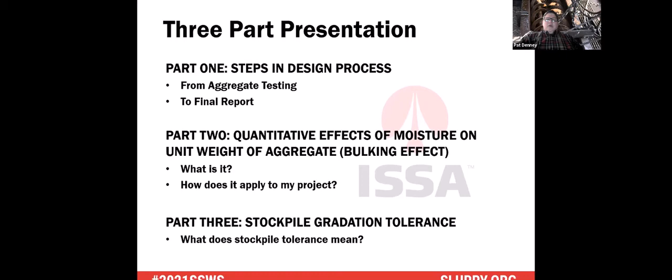We're going to talk about microsurfacing today and some of the different items, different parts. It's split out into 3 different sections. First section is for design and the design process from aggregate testing to the final report. Then we'll talk a little bit about the bulking effect, or the quantitative effects of moisture on the weight of aggregate. And then I want to talk briefly about stockpile gradation tolerance and what it means.

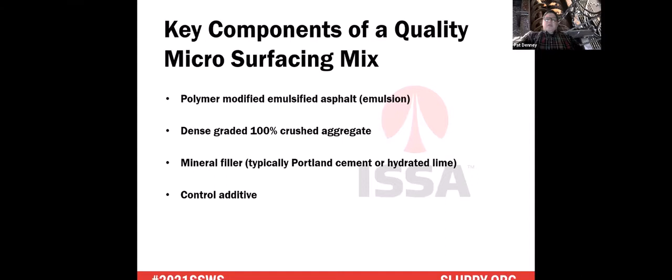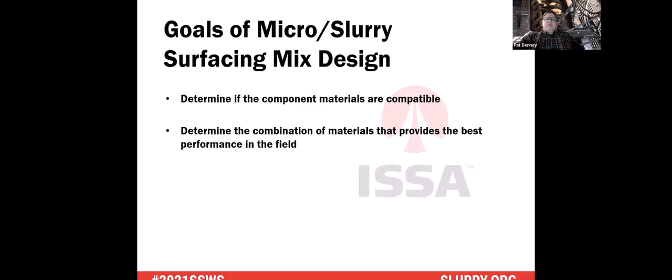The key components of a quality microsurfacing mix are polymer modified emulsified asphalt or an emulsion, dense graded 100% crushed aggregate, mineral filler, typically Portland cement or hydrated lime, and also a control additive. The goals of microsurfacing and slurry surfacing mix designs are to determine if the component materials are compatible and also to determine the combination of materials that provides the best overall performance in the field.

When we get an aggregate in for microsurfacing or slurry seal, the first thing we need to do is check the gradation and sand equivalency. If either one of those fails, it automatically triggers a retest of a second pail of the material that came in, and then we'll determine from there whether we move forward with the rest of the testing. We also test methylene blue value and report that, and we'll also do the unit weight or the bulking effect and report that.

Let's say everything passes on the aggregate, so we're going to move on to making emulsions. I like to start in my design process using what I call 4 corners, especially if we're looking at working with a new emulsifier or an unfamiliar aggregate. What I mean by 4 corners is that the emulsifier will be at a high and low value, the soap solution will be at a high and a low value, and then we also want to make sure that the emulsion we produce fits the specification that we're working with.

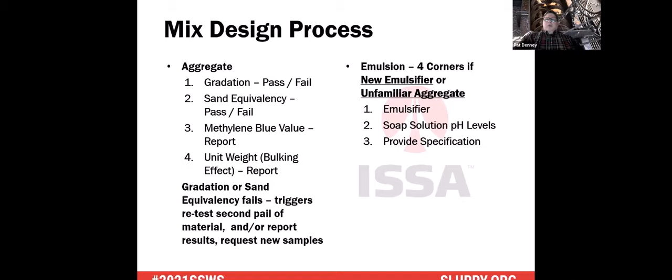After we get emulsions produced, we'll start doing our trial mixtures. During the trial mixtures, we're going to look at the effects that pH has on curing and on mixing. We're also going to look at the mineral filler and its effects on mixing and curing, so we'll adjust the mineral filler up and down to see whether it provides better curing and better mixing.

For the emulsion formulation, we're going to look at the different effects of the formulation, so whether it's a high chem load or low chem load. We're going to evaluate and record the mix times for that, and through all that, we're going to try and optimize that formulation. Then we're also going to evaluate the optimum moisture content, and we're going to do that based off of consistency, mix time, and curing at room temperature.

After we get our hand mixes completed, then we'll move to the performance testing, and you can see on the right the list of the tests that we run. I'll talk about those a little bit as we go through this presentation. And then finally, we'll write a report and submit it for review before sending it off to our customers.

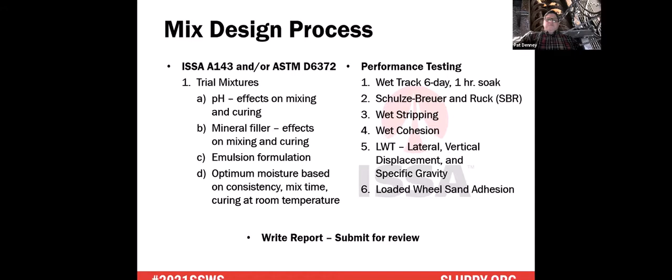Trial mixes. So we start out adding materials into our bowl the same way that they would be added into the pug mill on a micro surfacing machine. So aggregate, then mineral filler, water, control additive, then emulsion.

But what we primarily try to do is meet customer expectations. So we may be looking at a higher mix time or quicker cure time or whatever. So we're evaluating all those issues when we're doing the hand mixes.

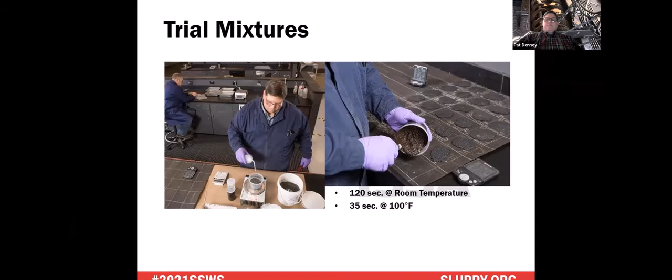ISSA TB100 is a test method for wet track abrasion of slurry surfacing systems, and the purpose of it is to establish minimum asphalt content for the slurry surfacing system. It also provides a determination of long-term moisture susceptibility after a 6-day soak.

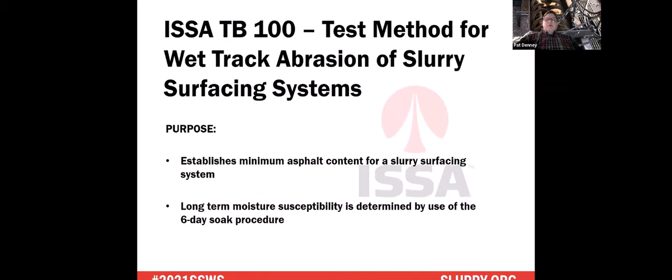Afterwards, you dry it and weigh it again, then calculate your grams per square foot loss. For 6-day soak wet track, it's 75 grams per square foot. For a 1-hour soak, it's 50 grams per square foot, and that's for microsurfacing. For slurry seal, it's 75 grams per square foot for a 1-hour soak.

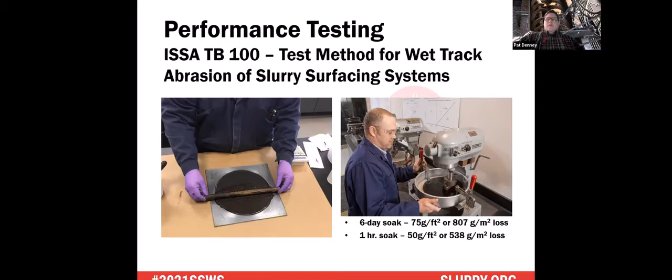When we make the specimens for wet track, we'll also start making our specimens for the Schulze-Breuer and Ruck procedure, typically because both of those samples have to soak for 6 days before we test them.

The purpose of the Schulze-Breuer and Ruck covers the determination of compatibility between aggregate fines of a specific gradation and emulsified asphalt residue, in which that emulsified asphalt residue stays the same no matter what the aggregate is. It's always the same percentage: 8.125% plus or minus 0.1.

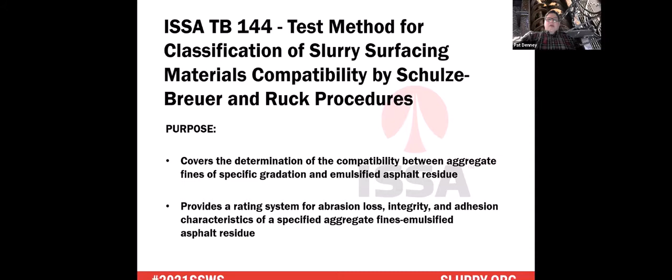It also provides a rating system for abrasion loss, integrity, adhesion characteristics, and the specified aggregate fines and emulsified asphalt residue. You can see here the 4 stages: absorption, abrasion, Ruck integrity, and adhesion. At stages 2 through 4, each stage earns a point rating, and it can only pass with a minimum of 11 points.

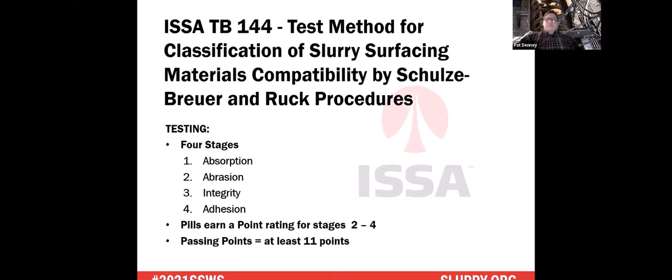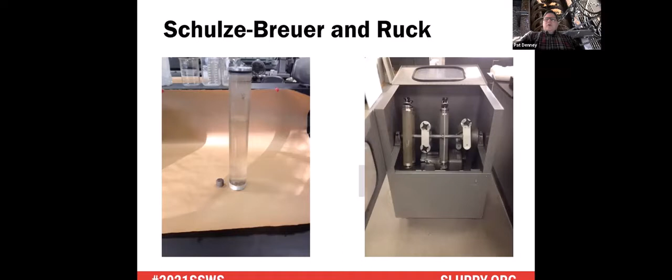We make the specimens in a small mold, compact those at 140 degrees Fahrenheit, let them cure out, and soak them for 6 days. After 6 days in a water bath, we pull them out, weigh them up, put them in this tube on the left full of 750 milliliters of water, then put them in the machine on the right to allow that to abrade through the water for 3 hours.

After that 3-hour period, we weigh it again, take it out, weigh it again, saturated, surface dry, and then put it in a beaker filled with water and let it come to a boil.

Then we put it into the basket and let it boil for 30 minutes. After 30 minutes, we take it out of that basket and let it cool for a few minutes so that we can handle it.

Then we weigh the largest cohesive mass again, and then we apply based off of that weight. There's a calculation that takes place, and then you can determine what your rating is for that different stage as well.

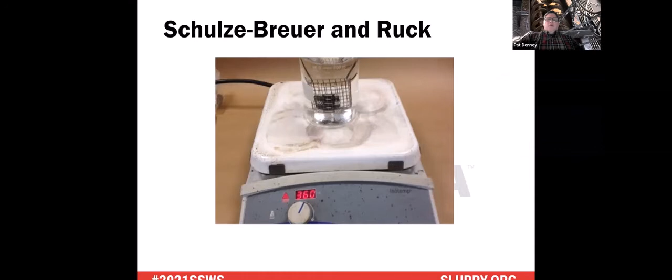The next test - while the wet tracks and the Schulze-Breuer and Ruck samples are in the water bath soaking for 6 days, we'll continue working on the design, doing other testing. These tests do not take near as long for curing and testing as those others, so we can do these and get the design done quicker instead of waiting for any test to finish.

So this is a test method for the measurement of excess asphalt through the use of a loaded wheel tester and sand adhesion. The LWT is intended to compact the fine aggregate bituminous mixtures such as slurry seal by means of a loaded rubber tire reciprocating wheel, and you'll see that in a minute.

The test may be used for design purposes to establish maximum limits of asphalt to avoid severe asphalt flushing under heavy traffic loads. So if you remember, the wet track was for establishing minimum asphalt content, and the sand adhesion test is to help establish the upper limits.

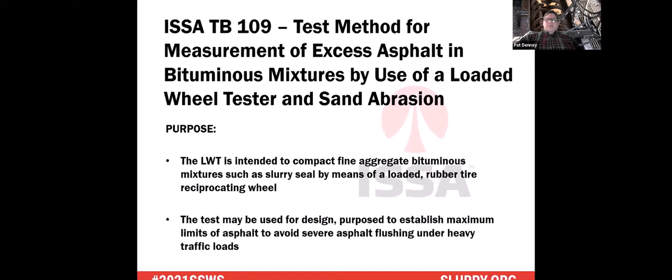On the left is the picture of the technician adding the specimen to the loaded wheel tester. You see the weights on top. That whole apparatus from the wheel with the weights weighs 125 pounds. The specimen is loaded into this machine and allowed 1,000 cycles over that specimen at 125 pounds.

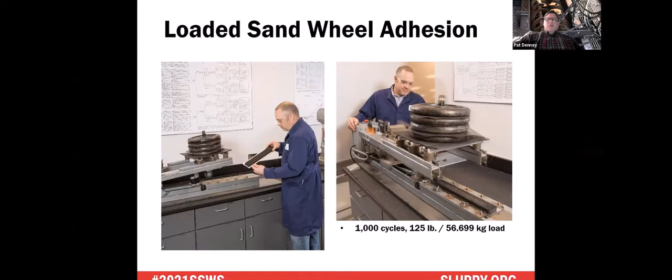You can see in this picture that there's three specimens: one before the test, one after it's been tested through 1,000 cycles, and the third after it's gone through the sand adhesion test.

Now the sand adhesion test comes in after we've done 1,000 cycles. We add hot sand onto the specimen, place a mold over that, add the hot sand, put a little metal plate over the top, and allow the machine to run over that specimen again at 100 cycles.

Pull everything off, tap the specimen trying to get all the loose sand off as we can, and then weigh it again. We weighed it before, we weigh it after, and then we'll get a maximum, or grams per square foot of sand adhesion. The maximum it can be is 50 grams per square foot. I apologize, I forgot to put that on this slide, but again, the maximum is 50 grams per square foot.

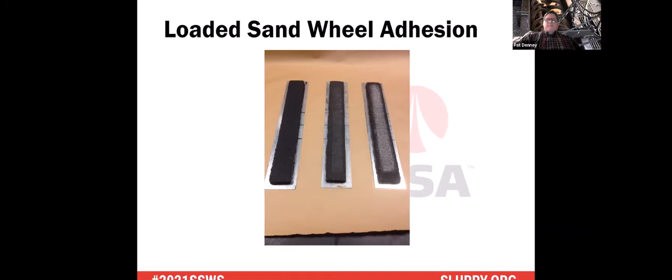Along with the sand adhesion, we also make specimens for testing the stability and resistance to compaction. We do that by measuring lateral and vertical displacement of that multi-layered fine aggregate cold mix.

Basically it's the same type of sample, but the difference is the curing for this specimen. It's a little longer cure before we actually do the test. It runs through the same number of cycles, 1,000 cycles.

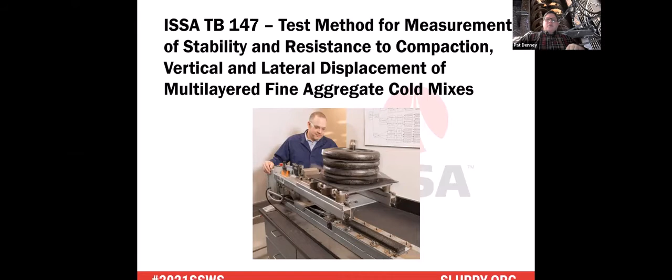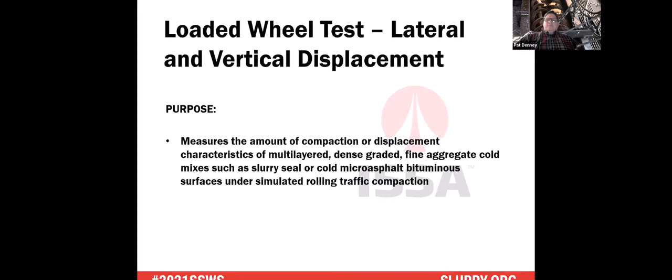The purpose is to measure the amount of compaction or displacement characteristics of the multi-layered, dense graded, fine aggregate cold mixes, such as slurry seal or cold microasphalt bituminous surfaces, microsurfacing, under simulated rolling traffic compaction. So as I said, 1,000 cycles.

Before we subject it to 1,000 cycles, we measure that specimen in 3 different areas along the center of the specimen and get an average. We do the same thing after the test. What we're measuring is the lateral displacement, how it moves apart or sideways, shoving if you will. It's not really shoving, but it does displace a little bit.

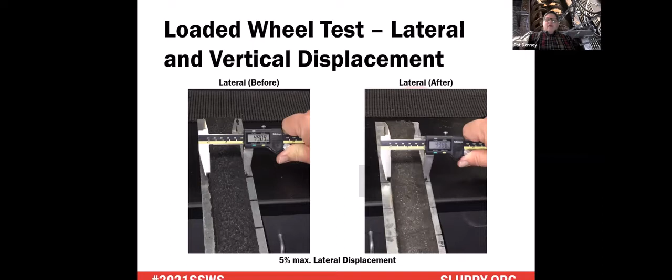The maximum for that is 5% lateral displacement. We'll do the same for vertical displacement, or the compaction of the material. We measure it before, we measure it after. It can be a maximum typically of around 10%.

We also measure specific gravity. Some specifications state that the specific gravity for the specimen should be done prior to lateral displacement. Some say after it's been compacted, or after the test has been run. But the maximum specific gravity is 2.1.

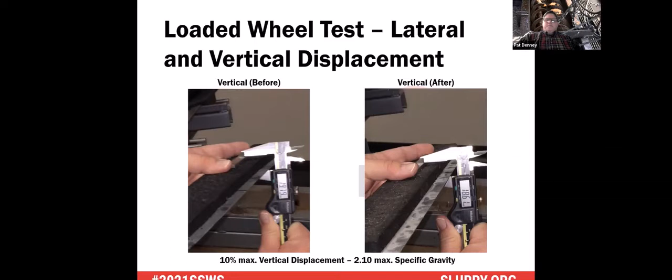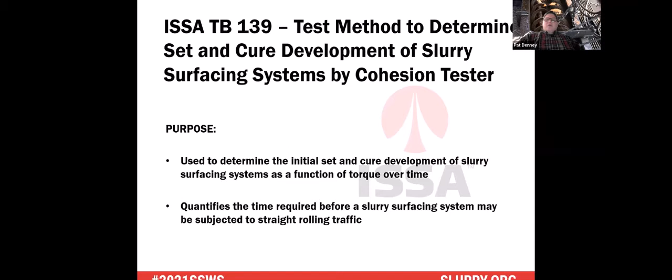The test method for determining the set and cure development of the slurry surfacing systems by cohesion tester is used to determine the initial set and cure development of slurry surfacing systems as a function of torque over time. This quantifies the time required before a slurry surfacing system may be subjected to straight rolling traffic.

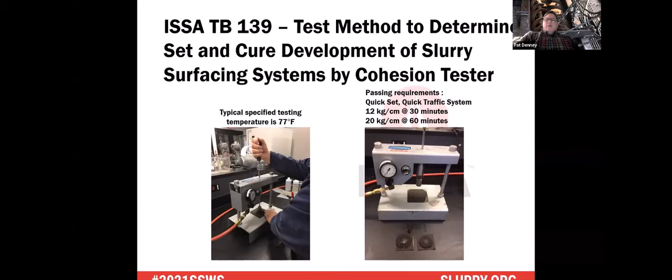The specification is typically for a quick set or quick traffic systems. It's 12 kilogram centimeters at 30 minutes. And for quick traffic, it would be 20 kilogram centimeters at 60 minutes.

It's allowed to boil for 3 minutes. There are modified boiling tests that boil for longer, but this particular test for ISSA TB 114 is a 3-minute boil test.

After it's through boiling, you decant the water and pour the specimen out onto a paper towel and let it set for 24 hours. Then it's basically a visual test—you come back and look at the material and determine with your eye as best you can the percent retained coating on the aggregate.

And if it's 90% or greater, it's considered satisfactory. Between 75 and 90 is marginal, and less than 75 is unsatisfactory. Now, personally, I've never seen one of these fail, but I'm not saying it won't happen, I've just never seen one fail.

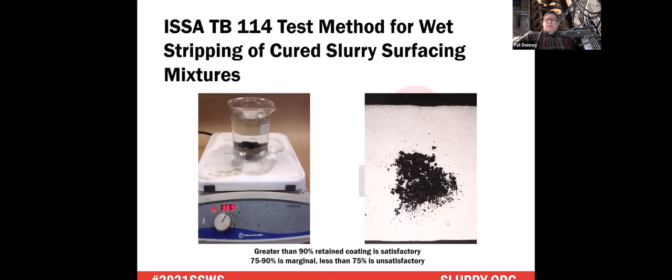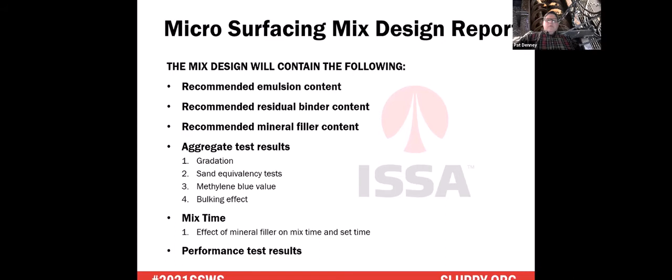All right, we're going to move on to section 2, the quantitative effects of moisture on unit weight of aggregate. This shows how we do it. You can tell we start with dry material -- you can see the dust coming up in the picture on the left. So you start out dry. On the left is the mold, a collar, and the aggregate being poured into the mold. It has to be around 2 inches above that mold.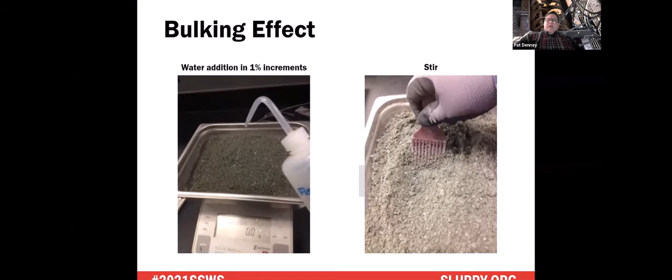Afterwards, we'll pull that collar off the top, strike it off even with the mold using a straight edge, and then weigh it. We'll do that, and then add 1% moisture to the aggregate at 1% increments, making sure we stir it around really well to get the moisture good and dispersed throughout the entire sample. Then we'll do the same thing again -- add it to the mold, strike it off, and weigh it again.

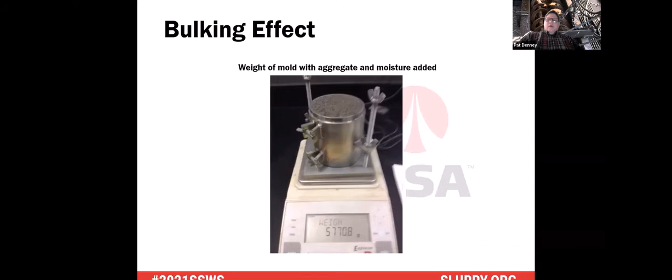This is a sample being weighed. You can see it weighs 5,770.8 grams. The mold itself weighs 4,500 something grams. On the next slide, I'll show you the table of the bulking effect.

You see on the graph at the top, the line shows that as we added water, the weight went down in pounds per cubic foot. The reason for that is the aggregate fines, when you add water, they swell and take up space, which creates less room for the aggregate to fill the mold. So you'll have less aggregate being added.

So you can see that as we went from 0 to 5%, the dry weight went down, and at 5% it actually bumped back up. The reason is that at 4%, that was the maximum amount of absorption for this aggregate in this test. At 5%, we're now weighing the aggregate plus the water it absorbed, and we also have excess water on the outside of the aggregate that we're weighing. So the weight bumps back up a little. 4% was the max amount on the bulking effect where it changed, so we didn't go any further after that.

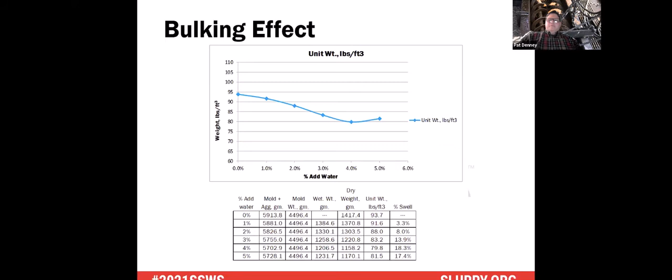Now I want to relate this to the field. Imagine that all my weights are the same as on the previous slide in the table below, but now they're changed from weight per cubic foot to weight in pounds. The reason is I want to relate bulking effect to the field. And if you look at it from the standpoint of just dry weight, which everything is based on.

Imagine you have a gate set at 4 inches, your stockpile has 3% moisture in it. You do all your calculations and calibrations, so you've got everything set -- your emulsion content at 12% with 7.8% residual asphalt in your mix. But what happens if your stockpile dries out and you're not keeping track of what's happening with your stockpile moisture? So it's important that you continue to check that moisture.

If it dries out and goes down from 3% to 2%, now the weight going through that gate, instead of being 1,220.8 pounds, is now 1,303.5 pounds. The amount of emulsion going into that mix -- and I forgot to say this the first time -- at 3%, when your gate was at 4 inches, the amount of emulsion going into the mix was 146 pounds, which equates to 12% at 65 residual, or 7.8% residue in the mix.

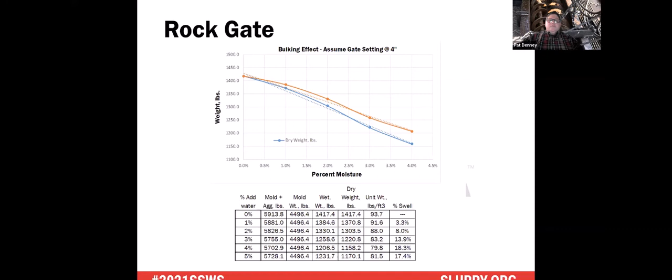Stockpile tolerance, as described in A143 of ISSA, is the gradation of the aggregate stockpile shall not vary by more than the stockpile tolerance from the mix design gradation. That's important, the mix design gradation, while also remaining within the specification gradation band, which is even more important. And also the percentage of aggregate passing any two successive sieves shall not change from one end of the specified range to the other end.

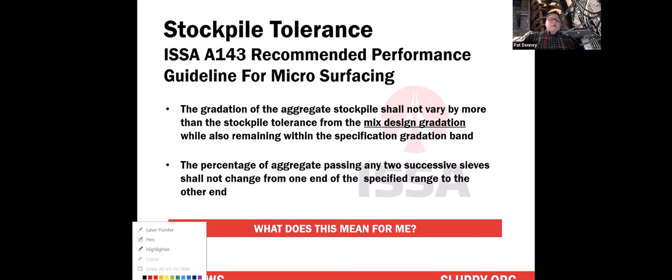Oh man! All right, quit touching stuff, Pat. Sorry about this, guys.

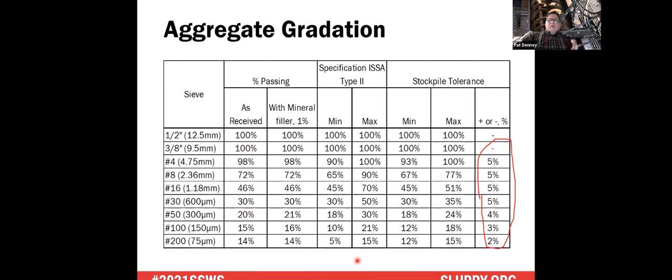We had some confusion this year. The explanation that they were giving to certain folks, they misunderstood what stockpile tolerance was. They thought the stockpile tolerance was based off of the specification and not the job mix formula.

So this is the gradation that we had for the design. This is what they had being delivered to their stockpile, and they were saying it was still within tolerance because it was within this percentage of these numbers here. Well, that's not true, and they didn't understand that at the time.

Because if you go back to the first slide, it has to be based off of the job mix formula gradation, and it has to be within the specification. So if you'll notice here, the stockpile tolerance does not go below the specification. These gradations are out of specification because they don't meet the spec, but they're also not within stockpile tolerance because they do not meet the specification.

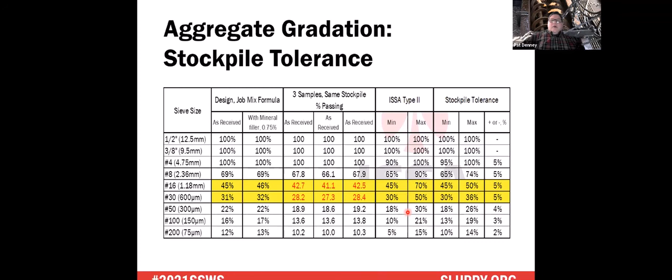I hope that's clear, I hope I didn't muddy the water anymore. If you have any questions on that, feel free to ask me, and I'll try and explain it a little better. Anyway, that is the end of my presentation.